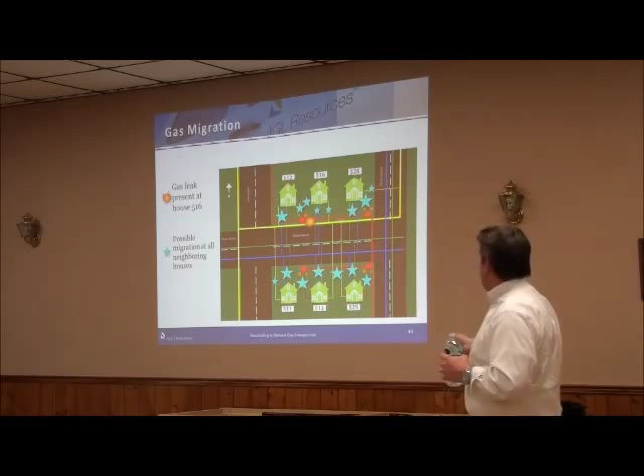But the problem was the folks two doors down, they moved out three months ago. So there was nobody there, they didn't know that they didn't have gas. In the meantime, gas filled up the sewer system. You look at all these points of entry into a house.

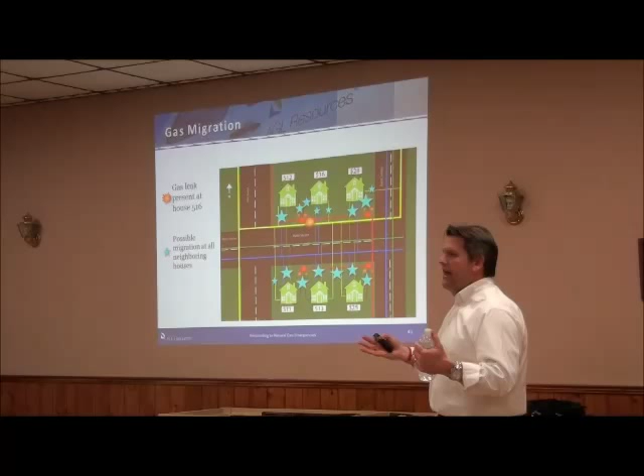The yellow indicates natural gas, or as we would say in Georgia, yellow indicates natural gas. Red indicates electricity. Blue indicates water, and green indicates sewer. All of this stuff is underground. So these are all potential travel sources for natural gas to enter into a house. I hear every gasman say it's a gasman's worst nightmare to have gas in a sewer because you've got all these easy access points into all these other houses.

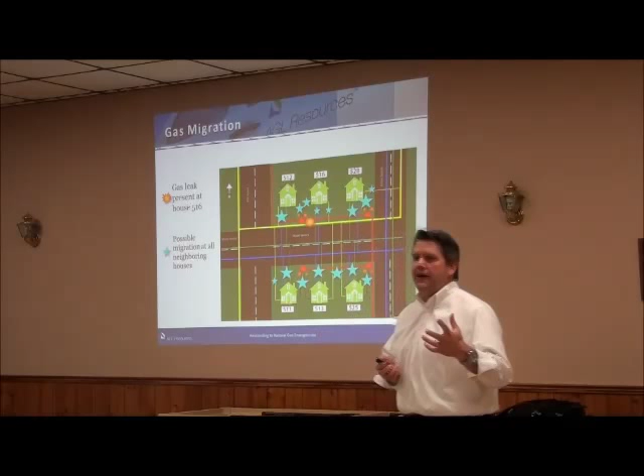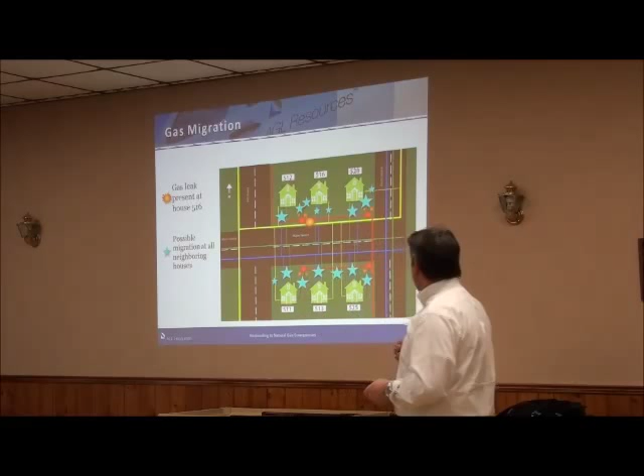So you want to consider the migration patterns of natural gas. Just because you get called to 516 doesn't mean just check 516 in the area. That's what we tell our folks all the time. With experience, they know, oh, the orange is cable. So there's all kinds of telecommunications, all kinds of different areas of entry into homes.

Good stuff. That was 516. And this is, yeah.

I don't have the particulars about how long they let that happen, but we hear it all the time about folks who have talked about, I thought I smelled a gas leak. It's been leaking for a year. I've smelled this smell for a while. You just don't think anything about it.

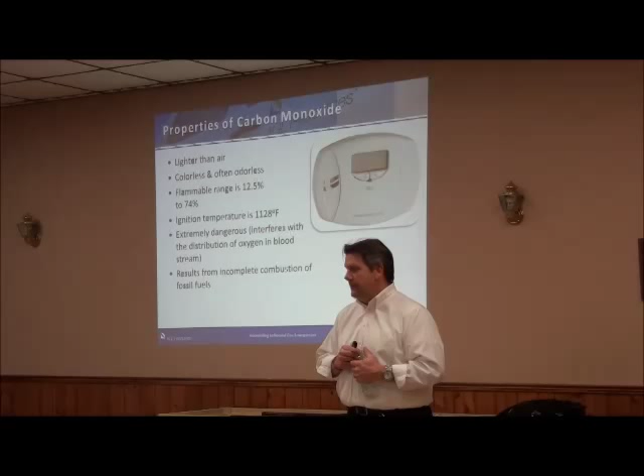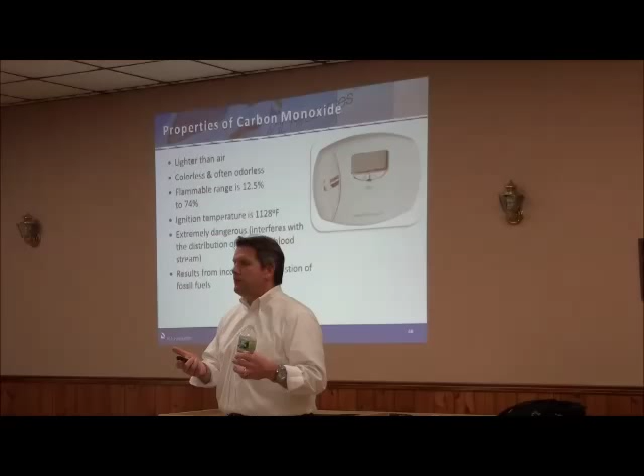We do deal with CO a lot as well, because in the wintertime folks are firing their furnaces back up. They've been off all summer, and a lot of times they're not burning the gas correctly. CO is colorless, it's odorless, it's got a higher flammable range, 12 to 74%, and a higher flammable ignition temperature. It is extremely dangerous. It does interfere with the distribution of oxygen in your bloodstream. Basically, when natural gas is not burned completely, that's when CO starts to happen.

Symptoms of CO exposure, a lot of folks confuse it with a common cold: a little bit of headache, shortness of breath, queasiness, flush face.

Folks, a lot of times you hear about people that when they go to their home, they feel sick, but when they go to work, they feel great. They say, I feel better when I'm at work, I just want to stay at work all the time because when I get home, I'm always tired. And they talk about their dogs being so lethargic. He used to have so much more life when he was a puppy or a little bit younger. Now these days he just lays around all the time.

Some warning signs: it may result in an acrid odor, similar to vehicle exhaust. If you notice condensation on windows and walls, it could be an indication there's not enough air movement to supply combustion air to appliances that are burning natural gas. So that could be an indication.

And lethargic pets, confused or disoriented occupants. So whenever you go out on a CO call, make sure you follow your standard operating procedure for those investigations.

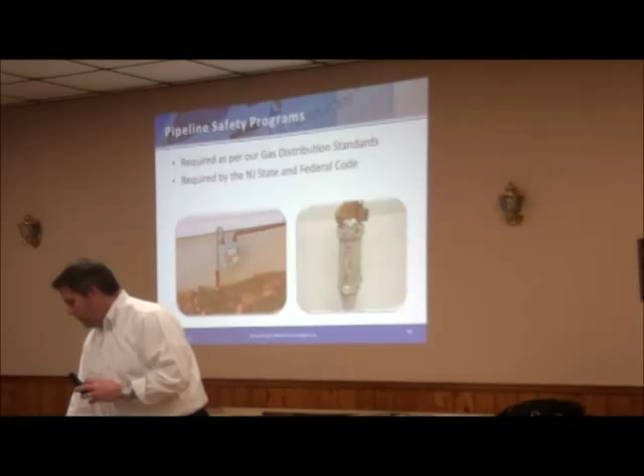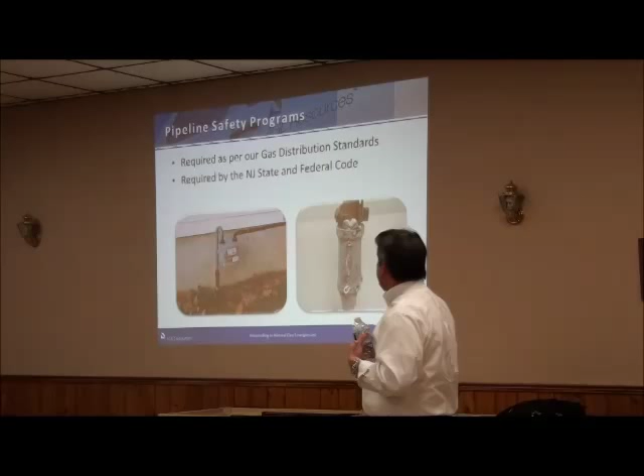Now, some of the things we're doing - we've got pipeline safety programs that we do to try to make sure that that stuff doesn't happen. It's required by gas standards and New Jersey State Board of Public Utilities.

We do leak surveys, walking surveys, mobile surveys, business area surveys, winter patrol surveys. So all the time we're sending folks out monitoring our lines with flame ionization units, with CGI units. We even use infrared - there's infrared technology to be able to see gas leaking up from the street. So we do a lot of different things to try to find leaks and make a repair when we find them.

We all have thermal imaging cameras - that'll show up pretty quick for you. There's infrared technology that companies like Heath, and I can't remember some other ones, but they say that natural gas has a certain pattern that these things are geared to be able to shoot and see. So they could do surveys from a distance without actually having to walk over the gas line. They could point it at the area where the gas line should be and see if anything's leaking up. So that technology's out there.

It's constantly advancing. This particular unit he's using right here, it's a flame ionization unit. It's got a little fire that's actually burning, and whenever it's drawing gas into it - this little tube right here is drawing gas up in. He's walking over the main along the street, drawing a sample into it. And whenever natural gas goes across that flame, it flames up bigger, gives a reading, and he's able to kind of pinpoint where we have leaks on our system.

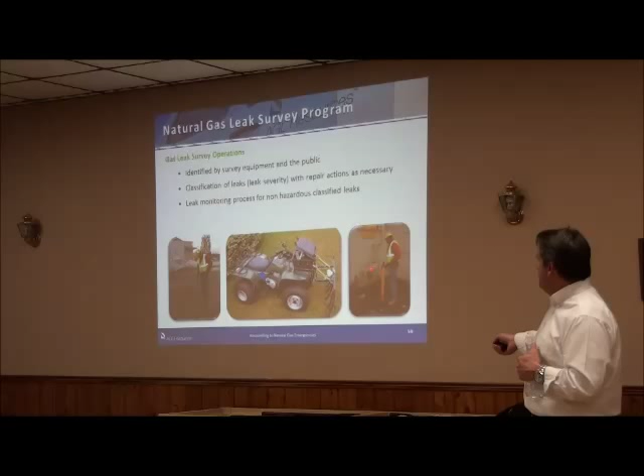So there again, there's that flame pack that he's using to monitor meter sets, sewer, manhole covers, all the facilities that we have on our streets. And we send - we've got a contract with a company that actually goes out on transmission lines like this that we own, or any areas that we own. So we're not the only ones doing this.

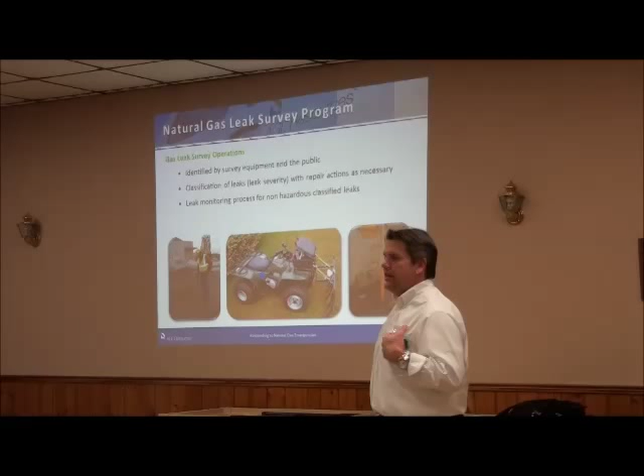I promise you that Columbia Gas has some mobile survey units that are going out there and going up and down pipeline right-of-ways on these back cross-country roads, and they have a system set up like this where they're drawing samples up to try to - how often do they do inspections?

So we're required to do 3-year and 5-year surveys. They're dependent on the way that the residences or commercial establishments are set up. Sometimes we have to do them annually. So it just depends - there's a number of factors that go into it. It depends on the pressure that's in the line, if it's a distribution line or a transmission line, the severity of the line - there's a lot of factors.

And the pipeline itself - is it cast iron, steel, or plastic? We get a little bit more leeway with plastic than we would with cast iron. Cast iron has to be surveyed a lot more frequently as opposed to plastic. All of those are rules that we don't make up - those are rules that are handed down by the DOT that we have to adhere to.

Again, all gas companies are falling up underneath distribution integrity management plans. We have to know our system. To keep incidents like this from happening, the federal government, PHMSA, is on our tail. They are laying awake at night making sure that doesn't happen, making sure San Bruno doesn't happen, making sure Allentown doesn't happen. Again, they're holding us accountable.

Do you know where all your leaks are? We're having to send leak reports in - when are you repairing those leaks? We're having to do all kinds of things that we've never had to do before. We're having to get down to the level of, when Mike sends his guys out to do maintenance on regulators at a regulator station, they want to know the springs that were changed, the diaphragm, when the diaphragm was changed on the regulator - to that degree. They don't want to know just leaks. They are holding us accountable to know our system, as well as we should. We should have that type of information.

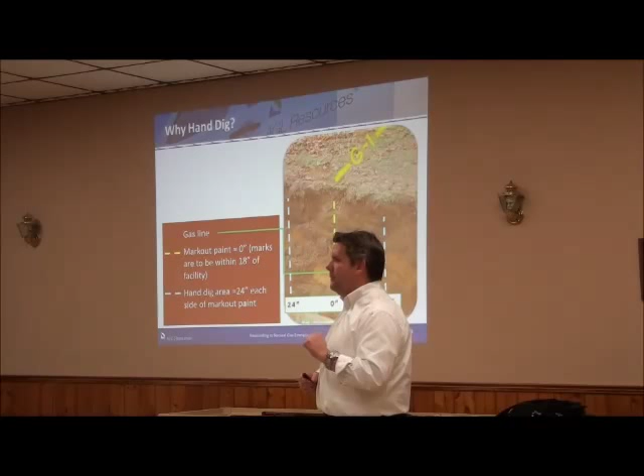Tolerance zones. We need to make sure that we're on our facility. We've got a lot of plastic in the ground, and our pipe locators aren't locating plastic pipe directly. We can locate steel pipe, we can locate cast iron, but for plastic we're locating a little piece of wire no bigger than a coat hanger.

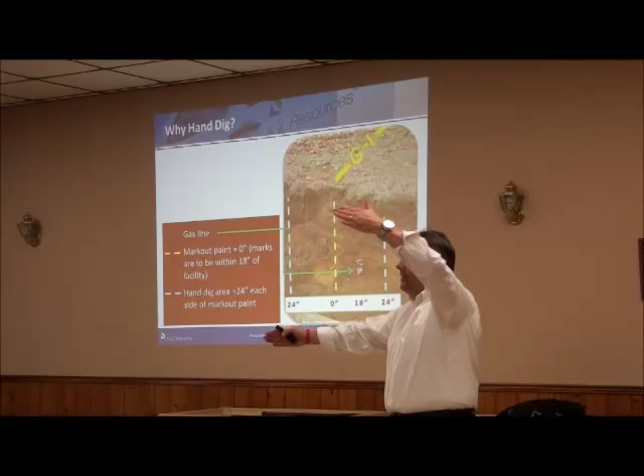So sometimes construction crews have put in the gas line over here, and we call it a tracer wire, a little bit of wire off the side of it. Well, our locator is going to put the mark right where that tracer wire is.

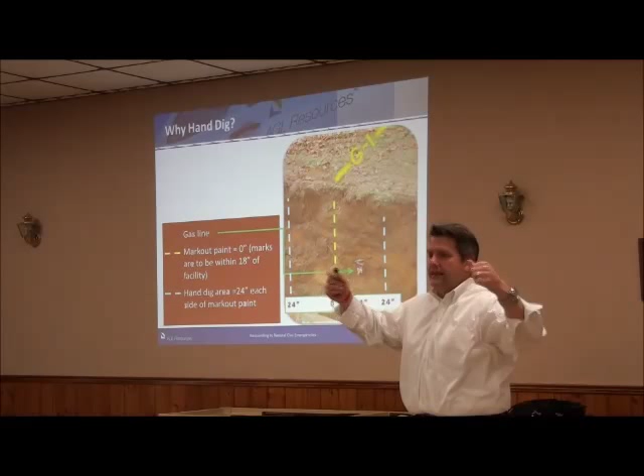We need to make sure that folks, if they're digging within that 18-inch tolerance zone where that line is, are using hand tools and not digging with mechanized excavating equipment. They need to be spotting the facilities too. So that's what it talks about, hand digging in an area, 24 inches within both sides of the markout.

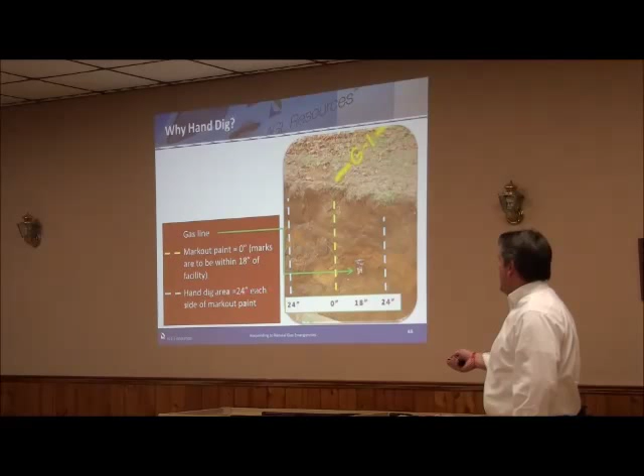They need to call 3 business days ahead, but not more than 10 business days. They must verify their location and dig date, and they need to have a copy of their request ticket on the site should somebody need to see it. They have to start digging within 10 days of the date they call, or the ticket will no longer be valid.

They need to take reasonable care to maintain their marks too. If they go over the top of them or mess them up, whether it's paint or flags, they need to try to remark it themselves, or at least maintain those marks that are out there. Every ticket expires 45 days after they call, so if construction's going past 45 days, they need to call on day 42 to make sure it's reset.

Just like I said, I'll cover all this information. If a homeowner or excavator causes any damage, obviously we want to call 911 and report that damage to the facility operator, and there's information there as far as what they need to do.

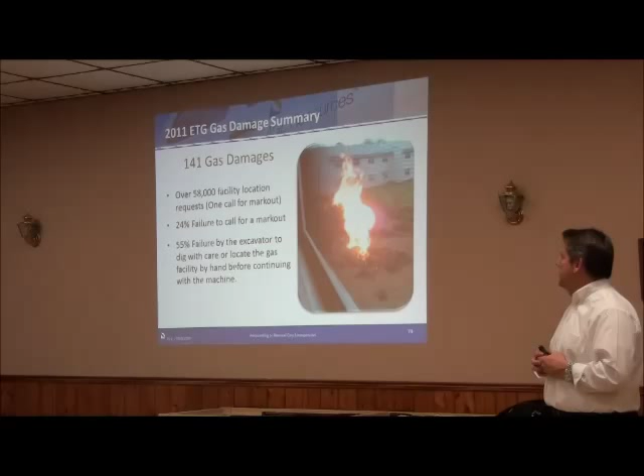Color code, as far as all the utilities are concerned. Just a little background, we've got data from 2011. We had 141 gas damages just on the Elizabethtown gas system alone. But we had to go locate 58,000 different requests, so we got 58,000 calls to go locate because of construction that was going on.

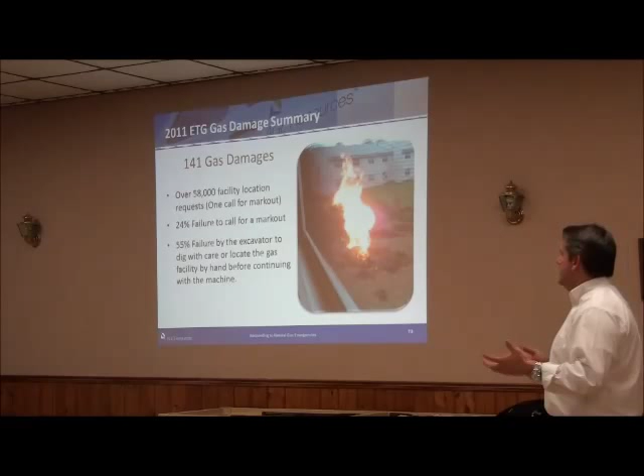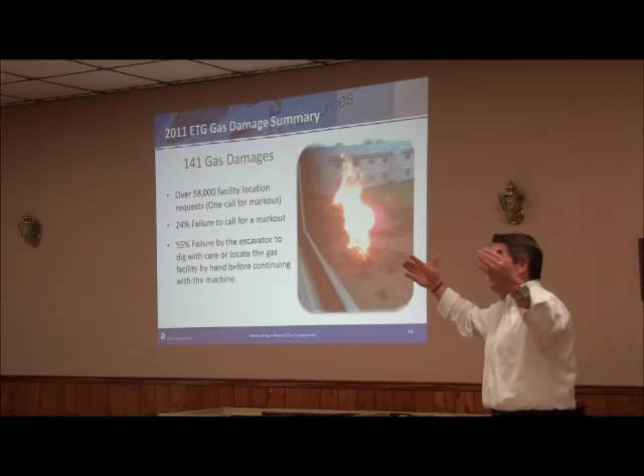Out of those 141 damages, 24% resulted because folks didn't call for a markout. And we had over half of them were failure by the excavator to dig properly. They were using mechanized equipment within the 24-inch mark, and they hit our stuff.

Is there a standard depth? There is a standard depth as far as distribution range. I think it's 18 inches of cover, but that's always changing. That line that was put in, Bruce, what year did you say that line was put in? 76, I think. So they put that line in 76, with their recommended 18 inches of cover. Ten years later, somebody comes and does something and grades it down. There's no way you can just turn around and say, here's the depth, that's where it's at.

So the main point we try to tell anybody that's digging is that if you're within 24 inches on either side of that locator mark, you should be digging by hand, using hand tools. Can folks hit stuff with hand tools and cause a leak? Absolutely. But that's the difference - if you hit something with a shovel or a pickaxe, you're not going to get fined as heavy as you would with a mechanized excavator.

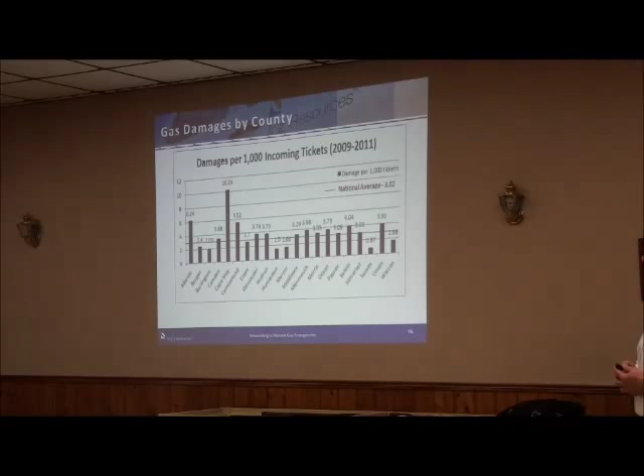Just some numbers there for the damages we have by county in New Jersey. What county are we in? Morris.

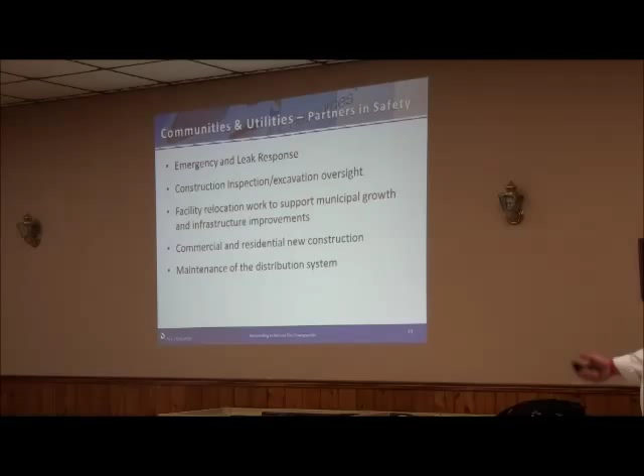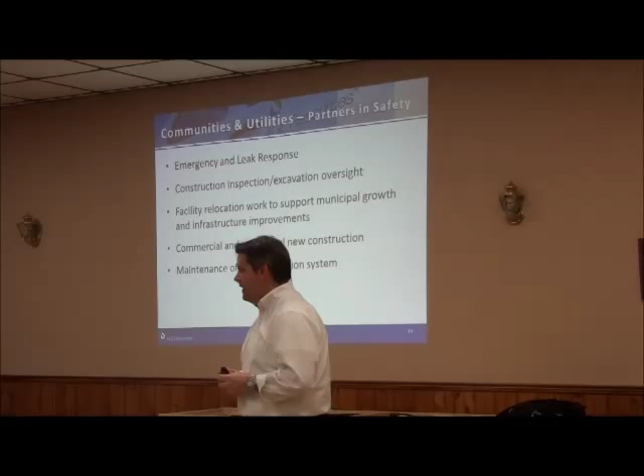We are partners in safety, working together on emergency and leak response. As far as construction, inspection, and excavation oversight, we're asking for your help. You guys are out there as well as our folks. If you see excavation going on outside and they don't have locate marks out there, there's potential for us to meet, so let's make sure we're educating folks out here.

We are growing, adding folks to the line, so it is happening. Making sure we're maintaining our stuff safely so we don't meet other than in a situation like this. There's a lot of information from the different operators that are out here.

Questions, comments, concerns? What's the reason for Elizabethtown Gas not offering repair service to their customers? We got out of that business many years ago.

Even Atlanta Gas Light used to do the same thing. It's one of those deals where obviously there's a dollar amount to where it's a little cost prohibitive to be able to do that anymore. But they would charge a repair contract or maintenance contract like the other companies. Yeah, there's also probably some risk factors our company just decided they didn't want to take on anymore. One of the things we do is there's a certain amount of repairs we can do that'll keep that pilot burning, but above and beyond that level, we'll partner with an HVAC company, or we'll basically tell folks to call a plumber or HVAC guy if it's an extensive repair.